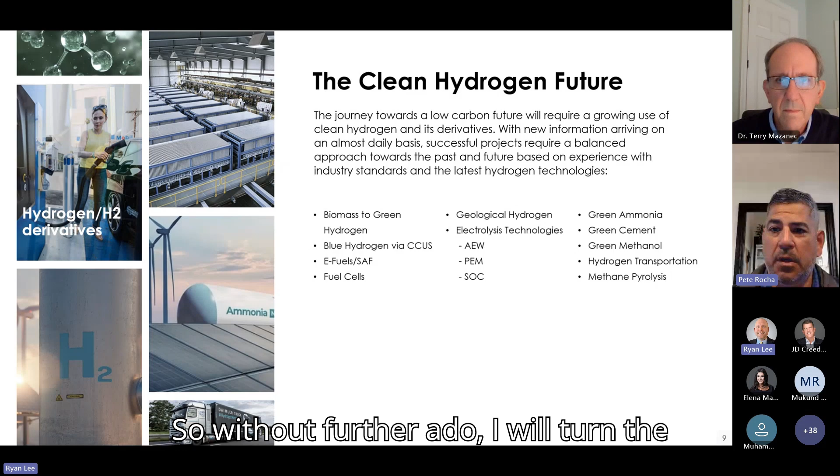So without further ado, I will turn the floor over to Terry and let him give his state of the state, if you will, on blue hydrogen. Terry.

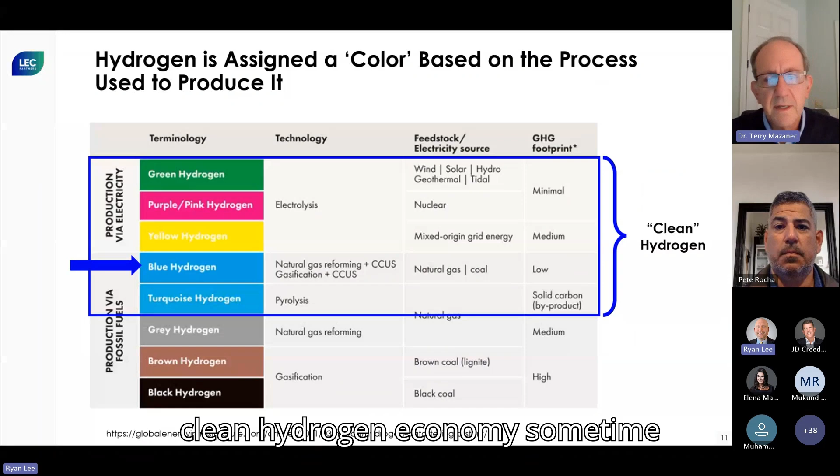Okay, thank you, Pete. You've probably heard a lot about hydrogen recently, and that's because of the development of clean hydrogen. As we morph into the clean hydrogen economy sometime in the future, there are going to be a lot of these things you'll be looking at. The way these are labeled by colors is primarily to differentiate them, so it's easy for us to talk about one particular process without having to describe it in detail.

And these have different carbon intensities. The most intense, of course, is things made from coal at the bottom there, moving on up. The holy grail is green hydrogen, made by electrolysis with renewable electricity from wind, solar, or other sources. Blue hydrogen fits in the middle of this. It's based on natural gas reforming plus carbon capture and storage, and it reduces the carbon intensity of natural gas reforming by about 50% or so.

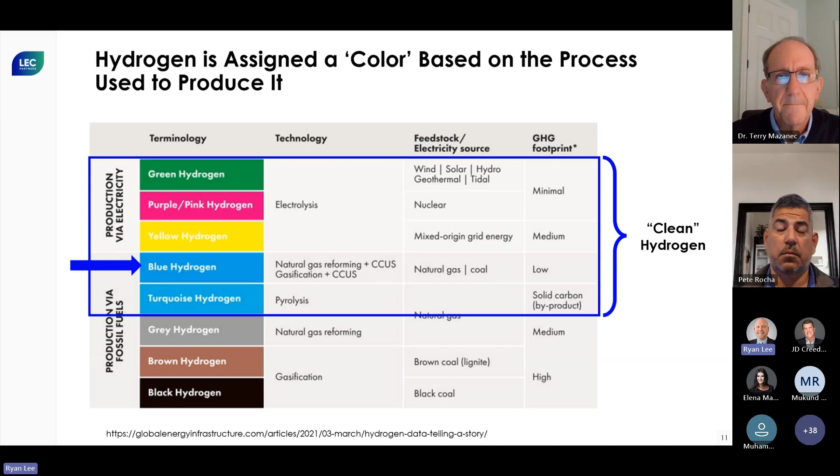Okay, what's projected to happen in the future, in the near future, in the hydrogen economy? There's expected to be a lot of growth in both low carbon hydrogen and renewable. Low carbon includes things like methane reforming with carbon capture, the blue hydrogen, and a few other things. Renewables includes things like electrolysis with renewable electricity, kind of the holy grail. This was done a couple years ago by McKinsey, and what they showed was that the expectation is that it's going to grow very, very rapidly.

They're going to add about 7.5 million tons per annum of hydrogen. This is clean hydrogen now, in addition to what's out there already. You can see it's divided between renewable and low carbon, with renewable being more. The darker colors here are the planned projects where people have fairly concrete plans, and the lighter colors are announced projects, and who knows what's going to happen with those. But they're expecting very rapid growth.

As you can see from the graph on the right, most of this is going to be in Europe and North America. Europe is going to focus more on renewable hydrogen processes, whereas North America is going to focus apparently on more low carbon type processes such as blue hydrogen.

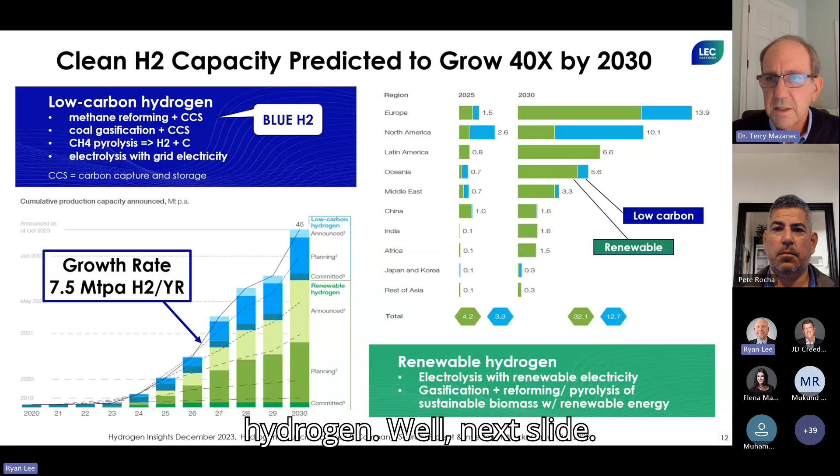Blue hydrogen is established technology. People use steam reforming and carbon capture at a number of places. Steam reforming is basically the reaction of methane with steam, water, to form ultimately CO2 and hydrogen after some manipulation. It's more than 100 years old, very well established, widely practiced, huge scales, and it scales down pretty well. There's almost no byproduct, just a tiny bit of ash, and it's fed by a very mature gas distribution infrastructure. Natural gas is right there, in everybody's home.

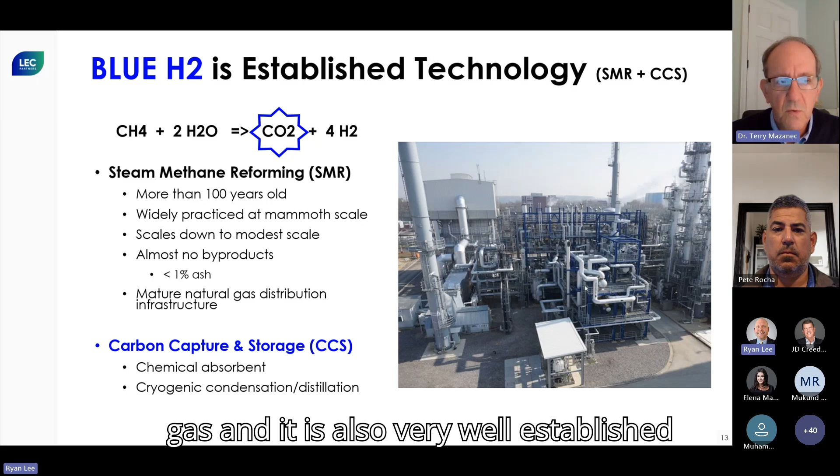Carbon capture and storage uses a chemical absorbent to extract the CO2 from the gas, and it is also very well-established technology.

Where does CO2 capture fit into a steam reforming or autothermal reforming process? Basically, you've got natural gas that you treat, and then you pre-reform to get rid of the things that would cause coking, and then you run it through the reformer, which is heated by natural gas. Then you do a shift to get the CO converted to hydrogen, and then you can capture the CO2 somewhere later in the process.

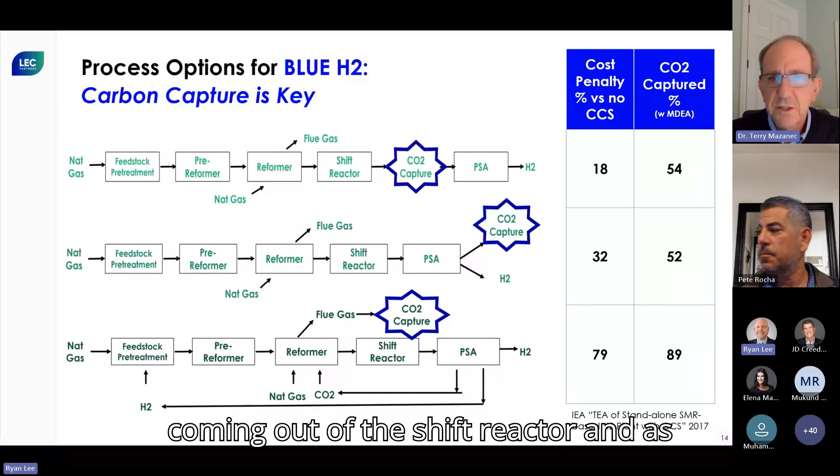On the top line, you see where CO2 is being captured coming out of the shift reactor. As shown on the right in the little table, you can get about half of the CO2 out this way—half of the CO2 that's produced. Obviously, you don't take the CO2 that's in the flue gas. But this costs you a penalty of about 18% on your capital.

In the second line, it shows where you take the CO2 out after you've done the pressure swing adsorption, separating out the pure hydrogen. This also allows you to get out about half of the CO2 that's produced, but it has a higher cost penalty, 32% of your capital.

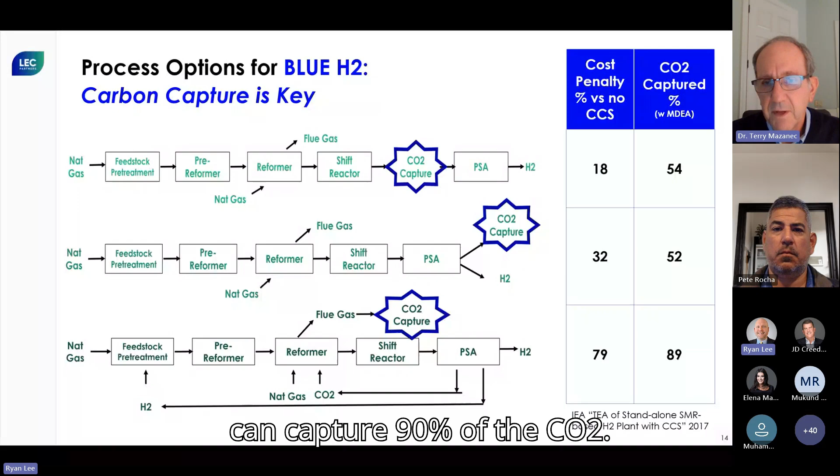And then the last line shows a way to capture the CO2 from the flue gas, if you have some recycle loops so that all of the byproducts get burnt with the flue gas. Now you can capture 90% of the CO2, but your cost penalty is even higher, a 79% increase in capital. So let's look at the next slide.

What about the carbon capture? Let's go to the next slide.

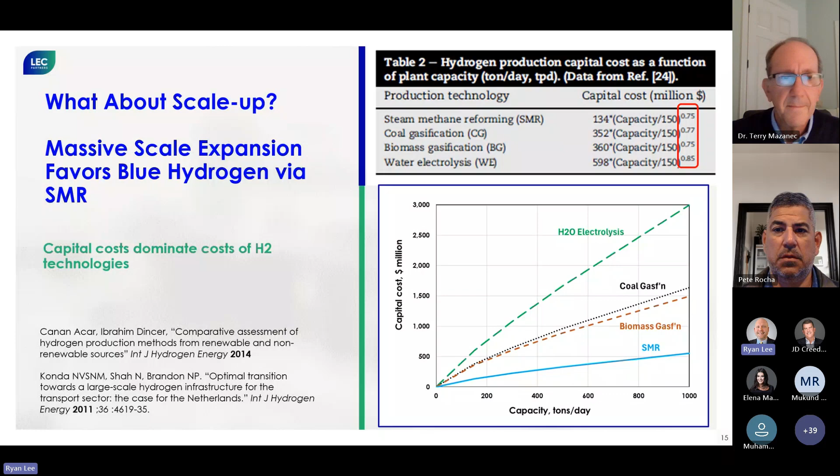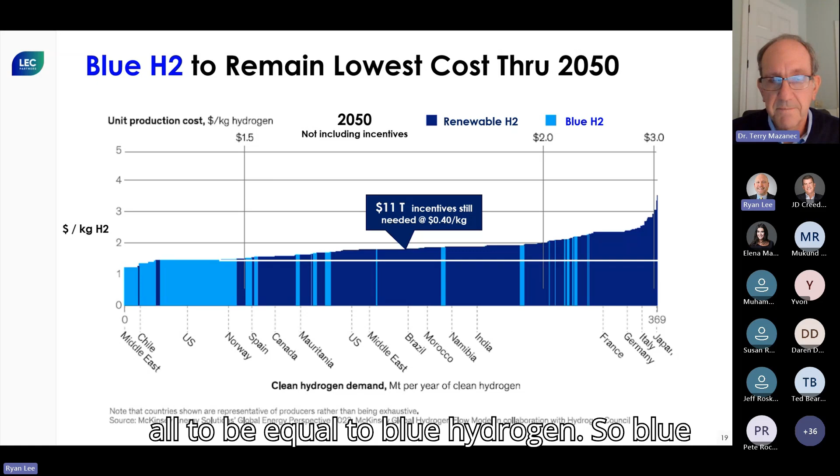We can see that if we look at the next slide, a projection much further into the future done by McKinsey a couple years ago. The light blue here is blue hydrogen, made with steam reforming or autothermal reforming plus carbon capture. Plotted on the x-axis is capacity, with some different places where that capacity would likely be. The cost on the y-axis for blue hydrogen is expected to be lower than for all these other renewable hydrogen processes going into 2050. I drew that white line to show what it would take in incentives to make them equivalent - it would cost about $11 trillion per year in incentives to level them all out to be equal to blue hydrogen. So blue hydrogen is definitely going to be favored long into the future.

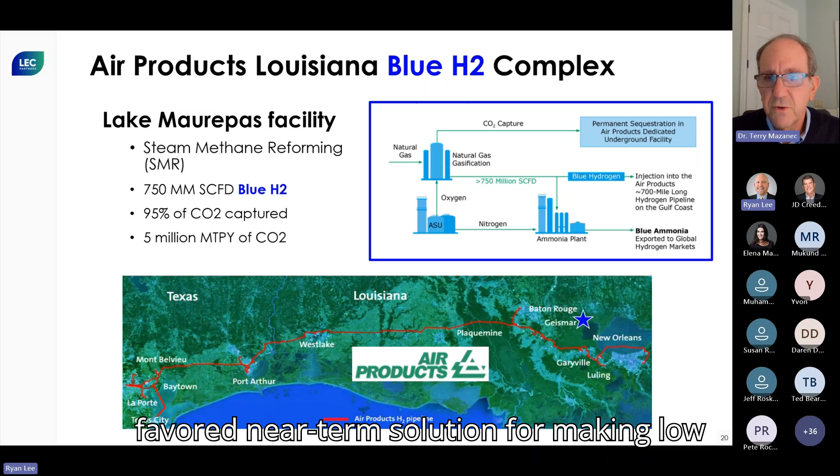And there are some actual projects underway. One is the Air Products Louisiana Blue Hydrogen Complex, where they use steam methane reforming of natural gas, to make 750 million standard cubic feet per day of blue hydrogen. They claim they're going to capture 95% of the CO2. This is moving forward - they're starting to work on this. There's a similar plant being built by Exxon that would make 1 billion standard cubic feet per day of blue hydrogen. So this is actually becoming a reality, and it's the favored near-term solution for making low-carbon hydrogen.

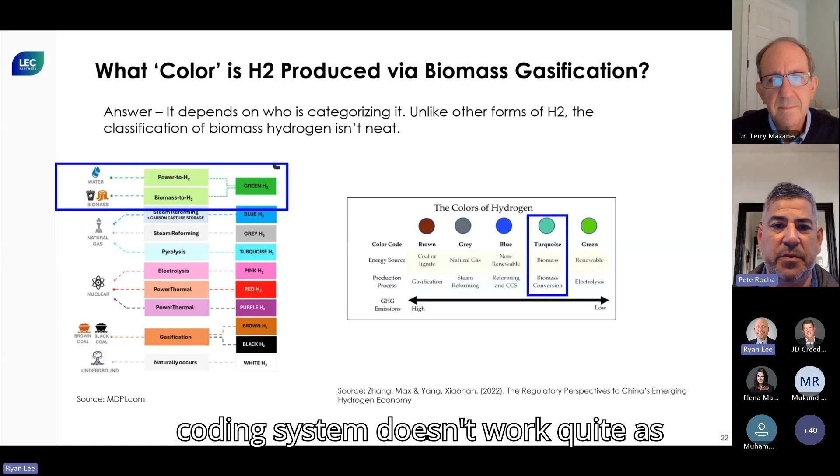So I did crib one of Terry's charts here, just to start out. What color, again, is biomass gasification? It's a little bit of a strange animal. In the chart to the left, that shows green hydrogen coming from biomass. On the right, another publication refers to it as turquoise. I've seen it listed as brown hydrogen, which I think is more when you gasify it in addition with coal - maybe not a fairly common practice, but is a commercial practice, biomass for power with coal. So a number of different things here - the color coding system doesn't work quite as neatly for biomass.

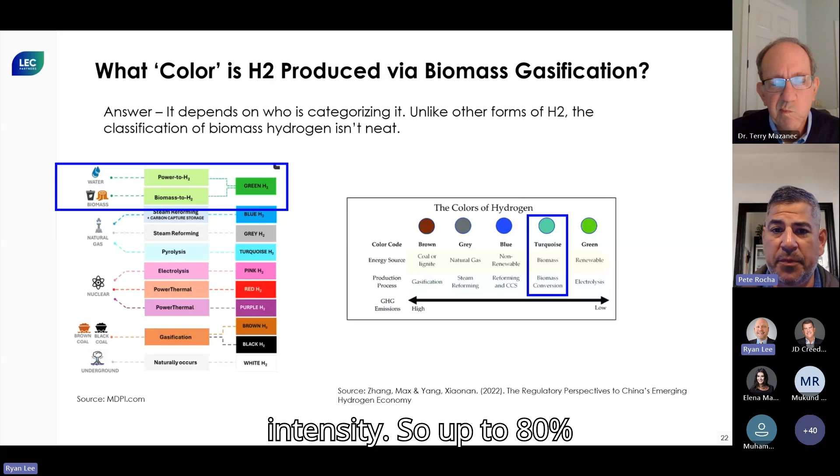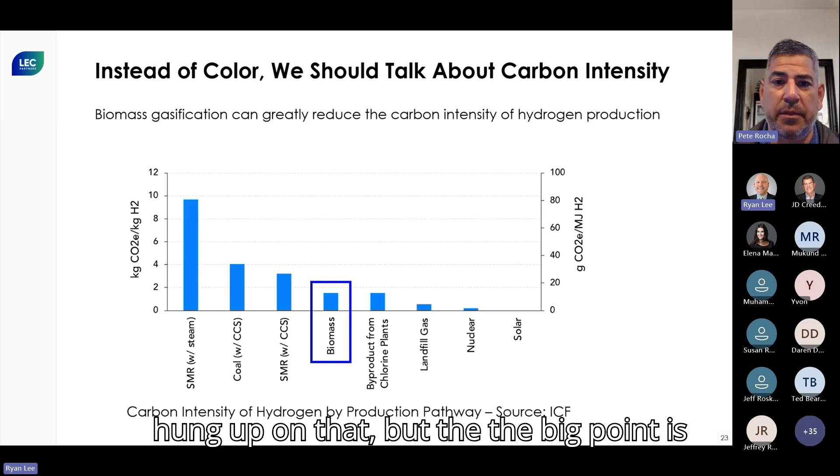It looks like biomass in this range would qualify for the production credit, which is up to $3 per kilo. How much exactly depends on carbon intensity on a specific pathway basis. There are a lot of variables involved, including the source of the biomass, how far it travels, et cetera, so I won't get too hung up on that. But the big point is it qualifies for low carbon programs, both nationally and in places like the state of California. So what is biomass?

A number of different things, including ag residue, purpose-grown crops, residue from sawmills and the like, recycled paper, and even municipal solid waste, MSW. Bottom line is it's all over. In the U.S. alone, there's an estimated billion dry short tons.

So just an overview of the gasification process, a multi-step process, and this is kind of generalized. There are different ways this could go. Even just starting with the biomass, depending on the source, if it's something like municipal solid waste, there's segregation and cleanup, so you might not have a uniform source of biomass. There's even maybe some pre-separation or pre-cleanup that goes into that.

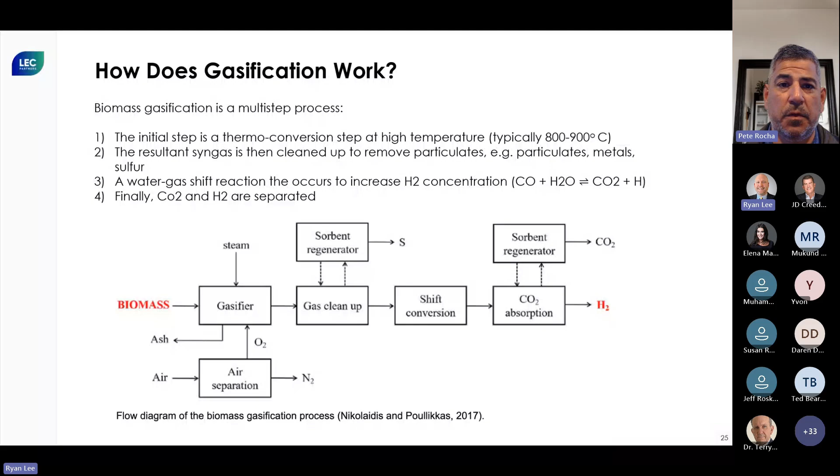So where does biomass gasification stand? This is a pretty old technology. I found a paper that said back in London, 1807, so 200 something years ago, was the first instance of biomass being gasified for power. Obviously biomass has been used for a lot longer than that in the form of wood, peat, etc. for burning, but gasification was used in 1807, and by 1830 in London, gas lamps were populated throughout the city using gasification from biomass in part.

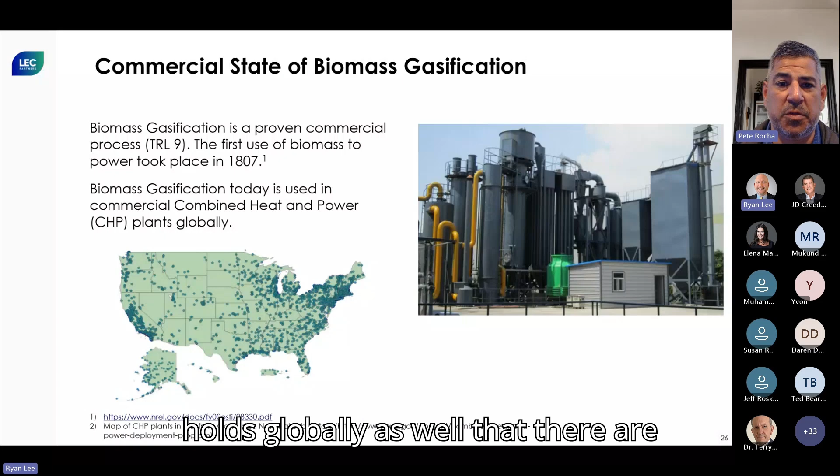Today, this is just a snapshot of combined heat and power, CHP, plants in the U.S. As you can see, there's more than a handful. So a very developed technology, and this holds globally as well, with hundreds, thousands of these plants.

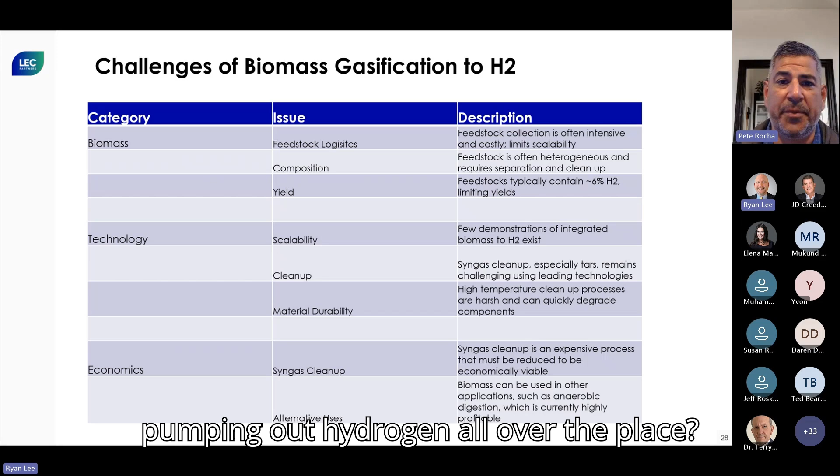So what's the problem, right? If you have an abundant source of feedstock and you have a commercial gasification process, why isn't hydrogen... why aren't we pumping out hydrogen all over the place? As you'll see here, there are a number of challenges.

I won't get into all the details on the far right, but in broad categories, there's biomass, as I mentioned before—there could be heterogeneous mixes of biomass, so there's the separation and cleanup. There's the expense of gathering biomass. You talk about things like deadfall in forests; we have to send a crew up to basically drag that off the mountains and bring it to some place where you can process it. Those sorts of things, plus the technology's scalability.

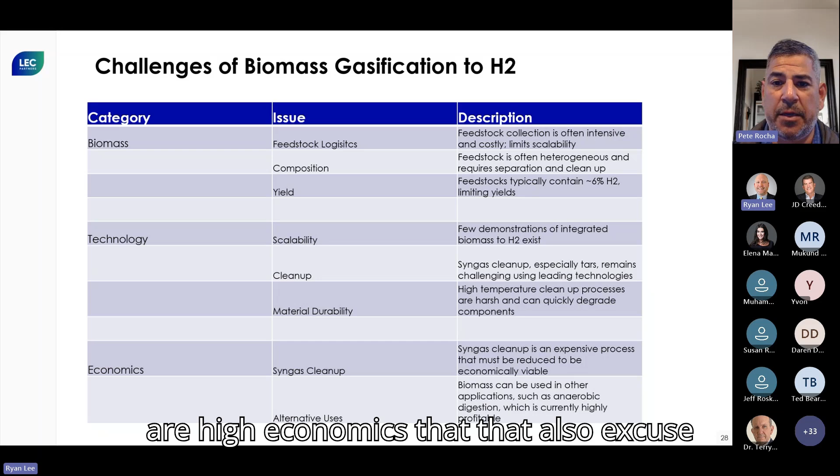Most CHP plants are fairly small, and that's just the gasification part. When you're talking about the integrated production of hydrogen, those are basically pilot scale—we'll get into more of that later. And then there's the cleanup of the syngas itself. There are challenges with that, and there are high economic costs with syngas cleanup that have also prevented commercialization.

So where do we stand? According to the IEA, there's no commercial production of hydrogen today. There are a number of pilot or demonstration plants, TRL 6-7 kind of stage, going on today, but again none of these are large scale. As far as I understand, I think the RWE project has undergone final investment decision and is undergoing construction. The rest are kind of in the planning phases. So not a whole lot of commercial data out there.

Okay, so when we talk about the economics, again it's hard to say what it is, since there are no commercial economics. But there are a couple good papers out there. One that I found, which I think is most credible, estimated the range of kind of $3.50 to $4 before low carbon incentives. As I talked about earlier, these could qualify for IRA 45V credits, low carbon fuel standard credits in certain states. So there's some interest there, but the production cost falls between what Terry was saying on the low end of blue hydrogen, around maybe $2 a kilo, up to kind of $6 or so. Jeff will dial into that from electrolysis technology. So it's kind of maybe a middle step in between.

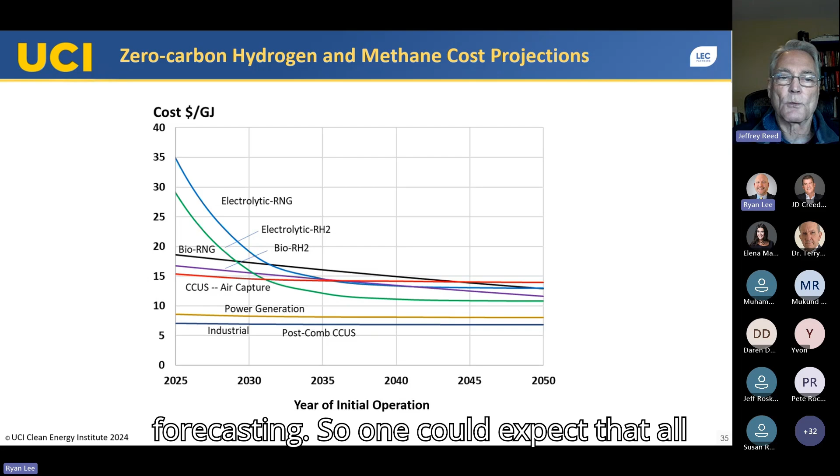And then, of course, technology advancements will contribute as well. In the long term, the band of costs in the range of $7 or $8 up to about $16 or $17 per gigajoule is within the range of uncertainty of this type of forecasting. So one could expect that all these technology groups will have a role to play.

So specific to electrolytic hydrogen, the cost of producing hydrogen through this technology depends on two primary factors. One is the cost of electricity. As a rule of thumb, these devices consume about 50 kilowatt hours per kilogram of hydrogen produced. So the cents per kilowatt hour delivered cost of electricity divided by 2 is approximately equal to the energy component of your production cost, with capital being the remainder. That depends quite strongly on what your capacity factor is.

This is one reason why some provisions of the new tax credit regulation relating to use of renewable energy credits becomes critical, because in high solar locations, if you can't use RECs, then you're limited to something in the range of 30% capacity factor. At current capital costs of around $1,200 per kilowatt, that's a pretty big burden, and becomes less sensitive to this as technology costs come down. In this early stage of the market, the political justification for subsidizing this at a $3 per kilogram rate potentially is to allow the technology to actually scale and achieve the targeted cost reductions.

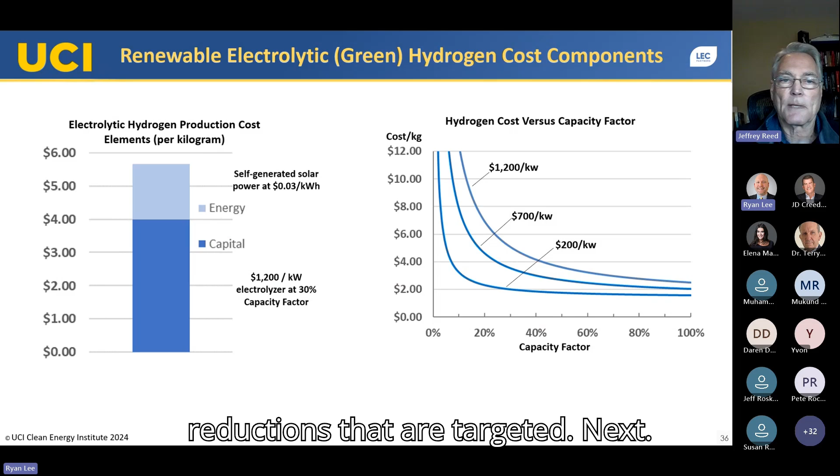So how are we actually doing regarding progress on electrolyzer cost reduction? I generally aggregate the different electrolyzer technologies with the perspective that the lowest cost, best fit will win. This is a combination of PEM, alkaline, and eventually as solid oxide comes into the market, we would plot that too. This is a forecast of cost reduction developed back in 2018, primarily based on the learning curve, which basically says for every doubling of global production of a technology, there's a predictable amount of cost reduction.

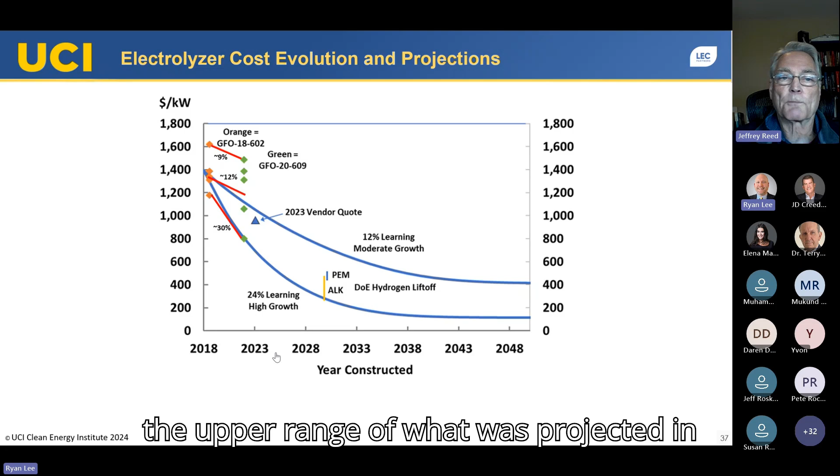For fuel cells and electrolyzers, that rate has been pretty well validated at around 18%. Without getting into the complexities of the chart, it basically shows high point to high point, low point to low point, and midpoint to midpoint based on actual data of bids and sources of actual project information. And it shows that, well, we are arguably making some progress on cost, but toward the upper range of what was projected in 2018.

So we did a projection in 2018 for the California market, specific to renewable hydrogen, of the market shares of the technologies based on our expectation of cost evolution. Interestingly, it came out to be about 50-50 between biomass pathways and electrolytic. Both of them, as you saw in my earlier chart, can potentially get to something in the range of $2 to $3 per kilogram, or roughly in the range of $15 per gigajoule or million BTU. Because of that, and in the case of California we have a significant biomass resource, we projected it to be about equal.

So some outlook here. There are some bright spots, and I would admit this is probably a little bit US centric. But when we look internationally, there are many hydrogen strategies announced continually. I saw something recently that said there are 60 of them, national and multinational strategies, that have a significant electrolytic hydrogen component. The US hydrogen hubs have been awarded - there are 7 of them, and by design they represent a range of production pathways, including blue hydrogen, electrolytic hydrogen, and biomass-derived hydrogen. The factory expansion announcements have begun to kind of match expectations, which is positive.

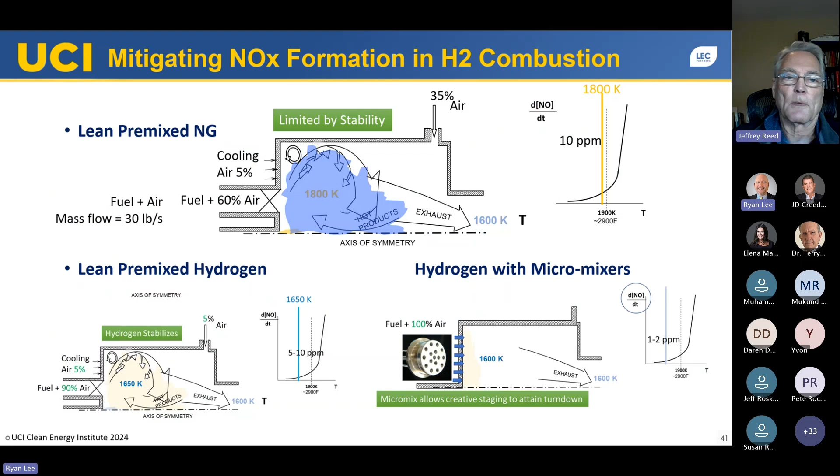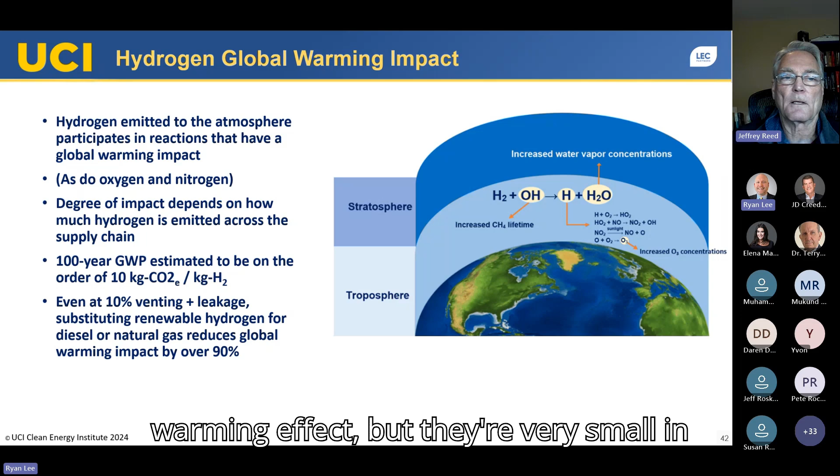We'll skip these - they're just about whether hydrogen forms more NOx. It's claimed categorically that it does, but that's not necessarily true. In most experiments we conduct, it reduces NOx for reasons we don't have time to go into. Same with global warming impacts - there are indirect reactions that can create a global warming effect, but they're very small compared to the overall benefit of hydrogen as a renewable fuel.

Thank you, guys, that was a great chat. Jeff, given that you're in the Irvine area, we hope you and your family are safe with the fires. Pete, I think you're a little farther north, so hopefully you're safe and sound. But our heart goes out to LA, obviously.

We do have a couple of questions that have come in, and I'll read them for efficiency. The first question asks: what does the hydrogen demand curve look like for the next five years? Is there demand differentiation based on the color of the hydrogen?

I'll start quickly here. The demand curve, at least as far as the IEA is concerned, looks like that production growth curve I showed - a pretty dramatic acceleration. Depending on policy regimes, I think people should care more about carbon intensity than color, but they're fundamentally looking for a least cost solution to hit whatever carbon goal they have.

California has a lot of binding regulations regarding carbon intensity of fuels, and people are saying, okay, I'm going to comply with the regulation, or maybe I'm doing it for environmental reasons, but I'm looking for the least cost hydrogen at a given carbon intensity.